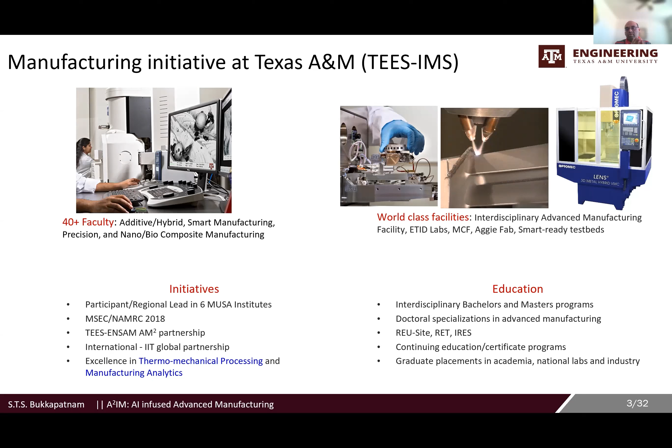Coming to smart manufacturing, the area I work in, it's really advancing and including digital twins as part of its advancement. Before getting into details, let me give my view of how I see smart manufacturing. When people think about manufacturing, they think about making things.

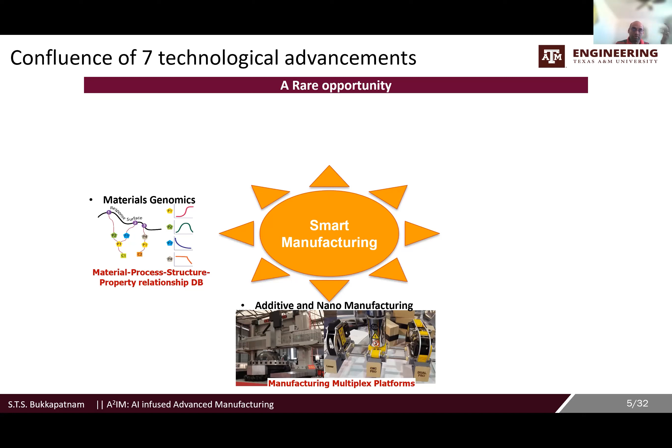In recent years, the idea of making and the maker revolution has taken off, especially with 3D printing and advanced manufacturing technologies. In addition to manufacturing platforms like additive, we're seeing advances in materials, AI, data science, sensors, wireless communications, computing systems like cloud, and clean energy sources. Smart manufacturing is basically a platform where you bring these together to advance the industrial footprint and its impact on society.

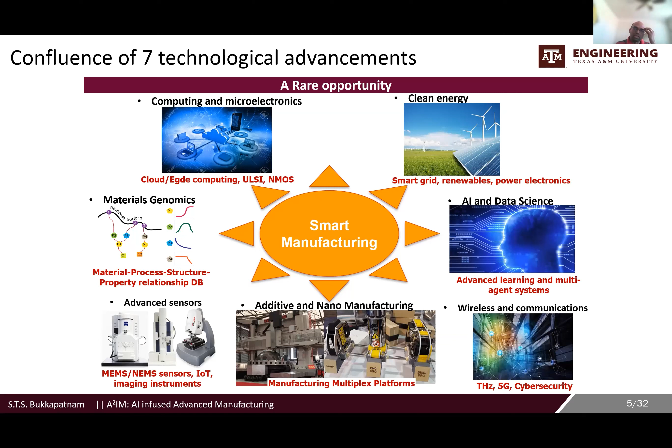About the impact: manufacturing contributes 12% of US GDP, and it's on the upswing given the times we live in. More importantly, from a smart manufacturing standpoint, there's a huge data opportunity yet to be tapped well, which is where those of us into digital twins can find fertile ground. In fact, manufacturing generates more data than any other sector, including government. However, very little of that data is used for practical applications.

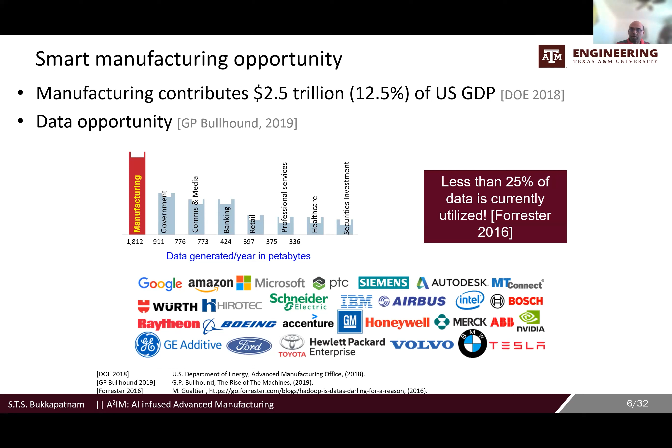Not just academics, even industry has fully recognized this issue and is trying to go big into the smart manufacturing revolution. So how can we use this data to understand the process and build models? Essentially, digital twins could be one way of building or thinking about this, using those models to effectively understand performance, as well as monitor and control the process.

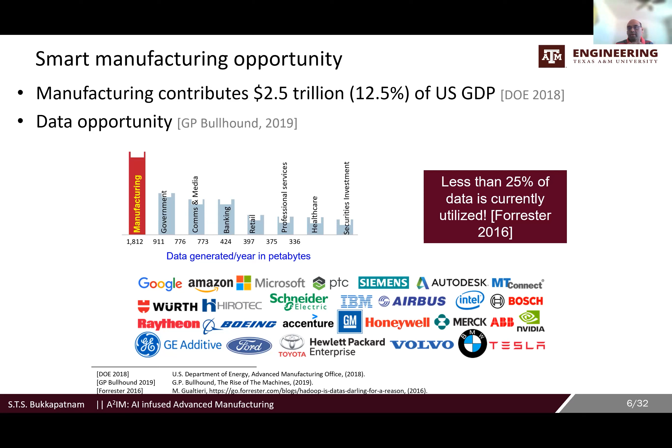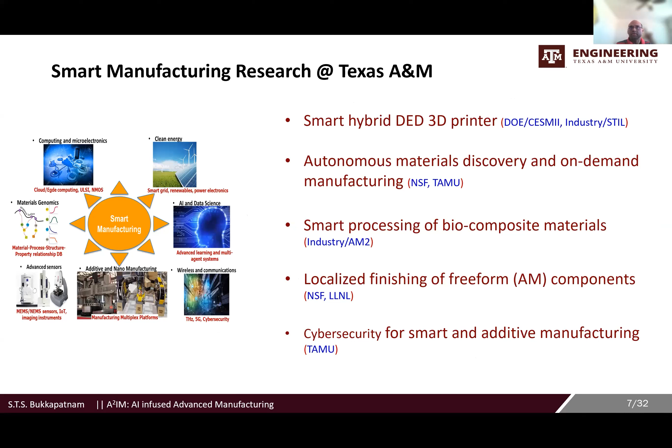At Texas A&M, my current research portfolio consists of things anchored around smart manufacturing, both at the machine tool level and at performance levels. We have sponsors from both industry and government advancing this work, and we're always looking for good collaboration opportunities. And when I say we, it's not just me, but 40 of us in the manufacturing group.

Now I'm going to shift gears and talk about how I see digital twins coming in and advancing smart manufacturing. When we think about digital twins, the first thing that comes to mind is a digital twin for a particular machine, like the photographs I showed you. Essentially, can we control the laser so you can study its performance? That's usually what's thought of when people think about digital twins.

But as we've seen from the diverse presentations today, there are interesting challenges at the systems level. I'm going to provide a quick case study to illustrate where digital twin technology can really help us monitor, predict, and possibly control the performance of your system, the integrity of the system, as well as help with maintenance of the entire plant.

At the machine tool level, I'm not getting into the details because other groups pretty much look at the mechanistic aspects of how the various electromechanical components that are pertinent to a manufacturing shop floor behave, and how we can monitor their degradation and ensure reliability of the various assets in your plants. But going from the systems to machine tool, there is something else to think about.

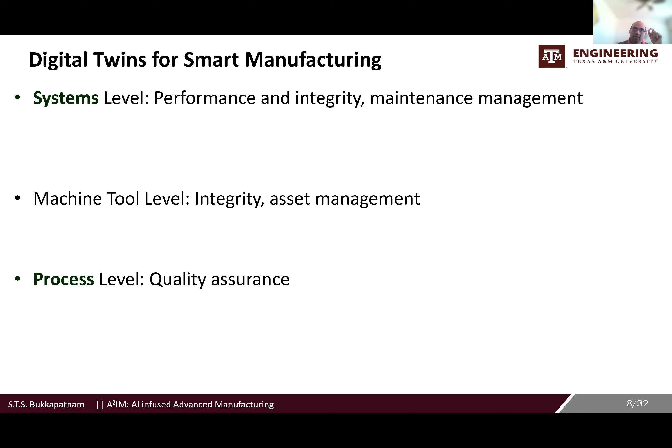For the remainder of this talk, I'm going to go into specific case studies to illustrate the points I just laid out, both at the system level and the process level.

However, I will ignore the machine tool level discussion because it's not just germane to manufacturing alone—various engineering domains have similar challenges for digital twins, be it aerospace, transportation, or building, as well as machine tools. Whatever operates its digital twin is basically similar to what I'm thinking in terms of machine tool level digital twins. But the systems and process level are kind of unique to manufacturing.

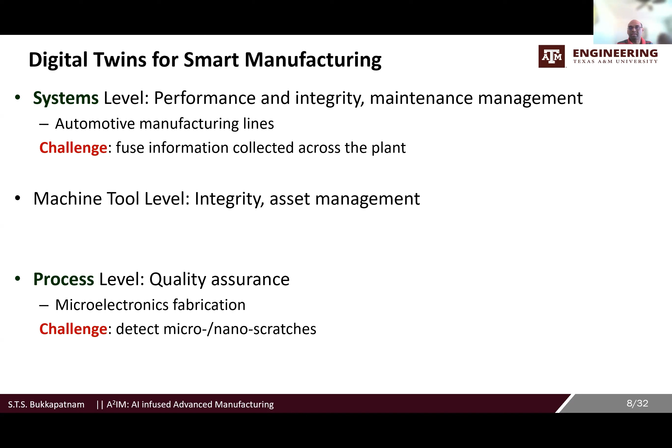And that's why I'll spend a little longer time on each of those. First, let me talk about the systems level digital twins. Before I do that, I wish to say that much of what I'm going to talk about from this point is from two of my papers.

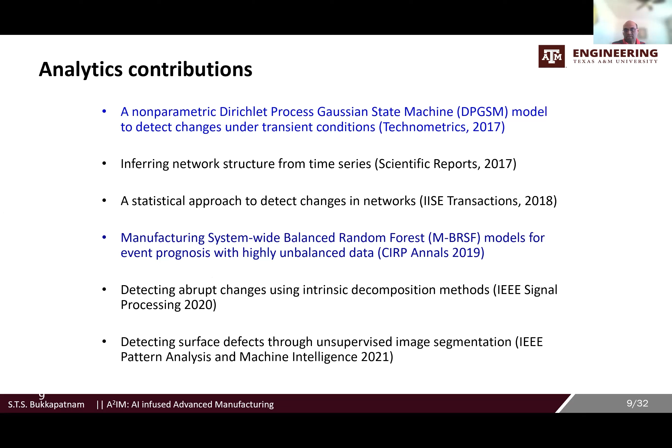On the systems level, I'm going to discuss based on the fourth paper, and at the process level, I'm going to talk about what's available in the first paper I mentioned. At the systems level, let's think about an automotive manufacturing plant.

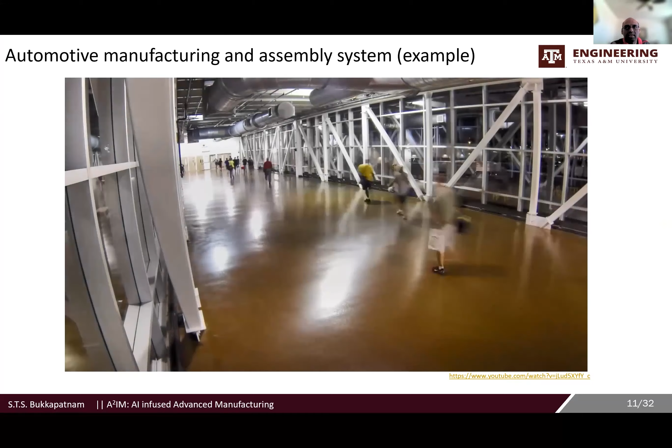Suppose you go to a factory floor where a car gets made. This is a typical video that you could see, showing how this process actually happens.

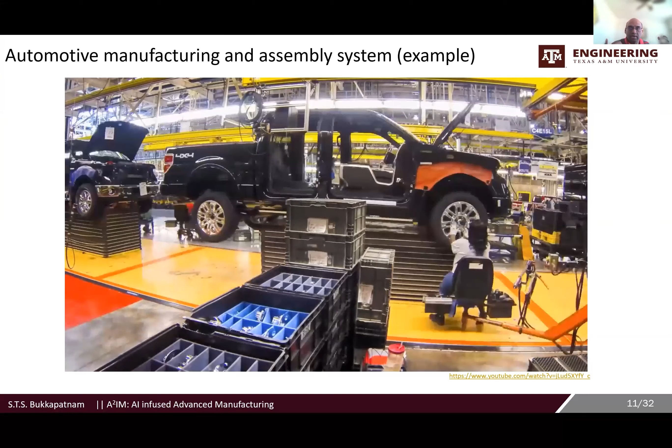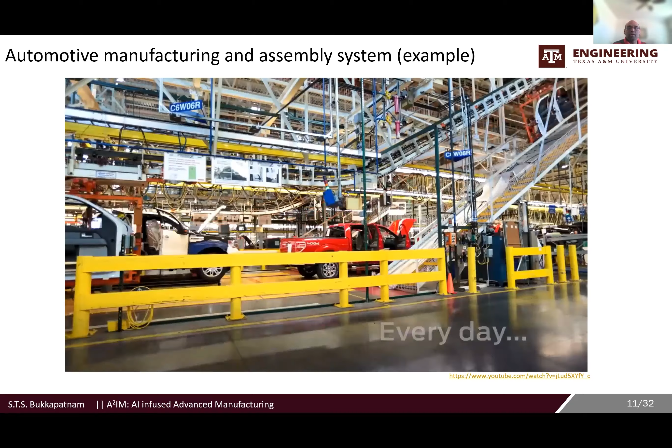A lot of people and a lot of stations and things that are moving—both the things that are getting made as well as the things helping move them as they're getting made. There are also tools helping transform them from the initial stage to the final stage. So in a typical manufacturing shop floor, you're pretty much looking at...

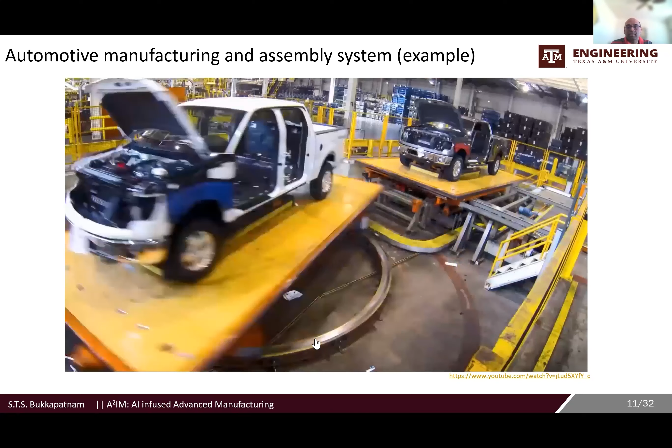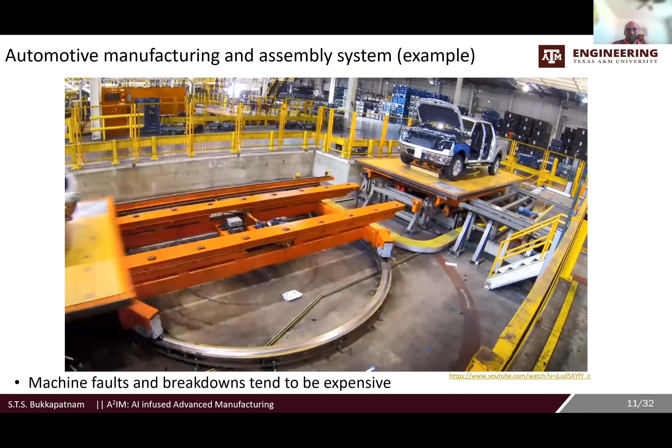basically hundreds of thousands of dimensions of a state space to monitor and then control. In other words, if you want to really understand a manufacturing shop floor, you have to think about maybe hundreds of thousands of variables and track how they're growing over time as well as in space. And that's what it takes to really mimic or create a true digital twin of a manufacturing plant. But that's just from a first principle standpoint.

But there is something else you can think about: can we actually look at the actual data that emerges from these plants and use that for building those digital twins? That is what I talk about here.

And this data is becoming extremely prevalent and abundant in these manufacturing plants. These plant floor systems that I talk about, that I see on the slide, are growing at 6.5% every year, and they're garnering a large market in the industrial shop floor.

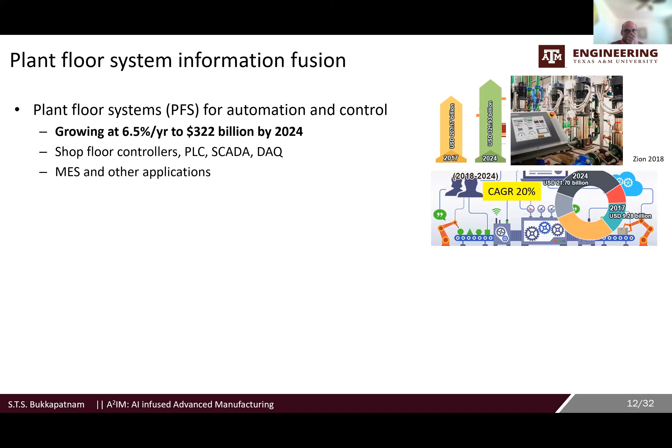What they do is go and record the status of everything happening, everything that moves from place A to place B. There's also software systems that handle higher level control—when you're releasing a particular part to go from one place to another, or allowing a particular robot to go pick up a part—all controlled at the software level using what is called a manufacturing execution system.

They are growing really fast. And more importantly, those of us aware of Internet of Things sensors know they are really getting absorbed into manufacturing environments, growing at 40% annually. So together they're creating a huge data load in the industry.

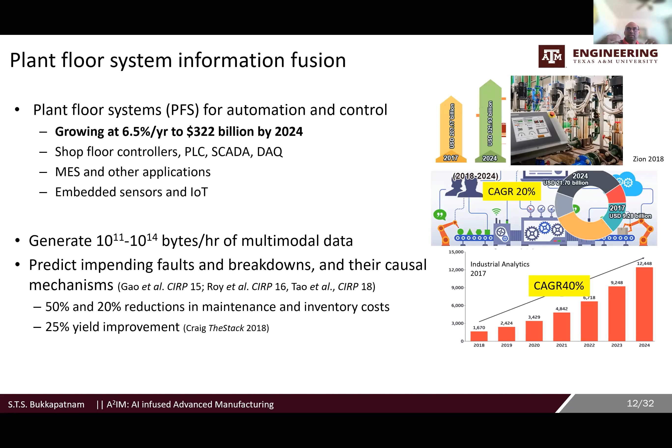And that is a huge opportunity, because if we can really use this data, maybe one of these days we can create a good digital twin with which you can predict what's happening. Researchers have shown that you can use this data to effectively predict faults and breakdowns in a shop floor, thereby bringing 50 to 20% reductions in the cost expended for maintenance as well as holding backup parts, called inventory, and so on.

And more importantly, if you don't do that with all the digitization that's happening in manufacturing, you're going to see a similar kind of catastrophic event, such as a blackout that might destroy the entire manufacturing network, because everything is now connected in the industrial environment.

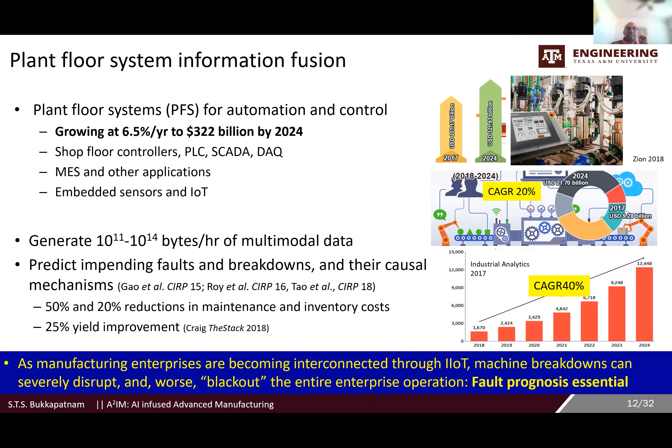Now let me spend the next 5 minutes talking about a few quick case studies. A manufacturing plant—I won't get into the details of where and what this plant is about—but let's assume this is a segment of your automotive industry where you're trying to make a simple component, which consists of a bearing as well as the race that goes into one of the engines or engine-related parts. That particular small segment of the plant has about 20 machines, and they are connected together.

The part actually goes from this end to this end. There's another part that goes from this end to this end, and then together they are all assembled, and then sometimes they are reworked and so on. So you have multiple machines, multiple handling systems, going through very complex routing and so on.

But there is a lot of uncertainty. How long that particular part spends in each machine is not deterministic. When a particular part arrives is not very well known, because that depends on the demand and the releases and so on. And also the routes can change depending on what happens in the previous stage. So essentially it's a complicated system.

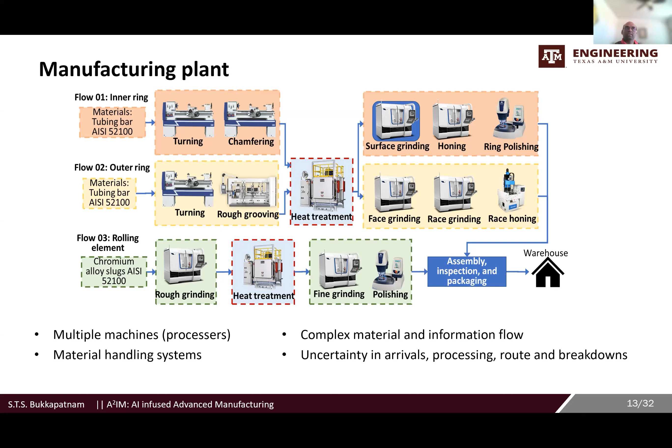In order to track that, you really need to build a very effective understanding of the process and use the data. And here we are developing a manufacturing process-driven machine learning approach to address this challenge.

And the challenge here is, can we actually predict the breakdowns of machines by using the data from some of these machine tools, the plant floor information systems?

And we take advantage of our understanding of the manufacturing process, in the sense that we know a part released from a particular location has only a finite number of places to go, and it has a particular recipe that it's executing. That is, a car has to go from wheels, and the wheels have to be under a particular bonnet and so on. So that's the whole idea we build in to create a network, and based on that, we make the predictions.

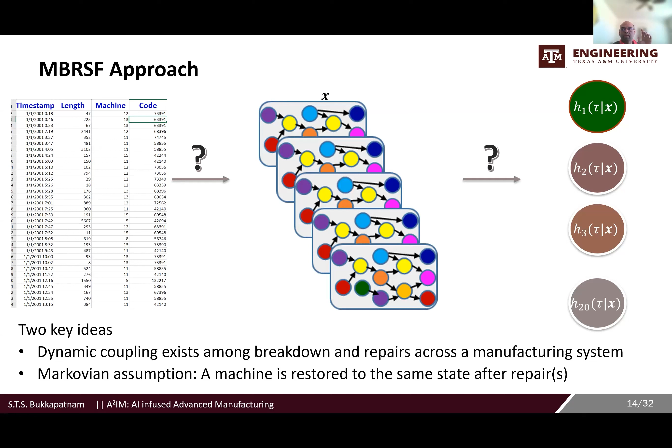To get into some details of the matter, what you have in the logs from these manufacturing environments are sheets like this. What they show is at different times, how long a machine has been working, and then what kind of fault it had, and so on.

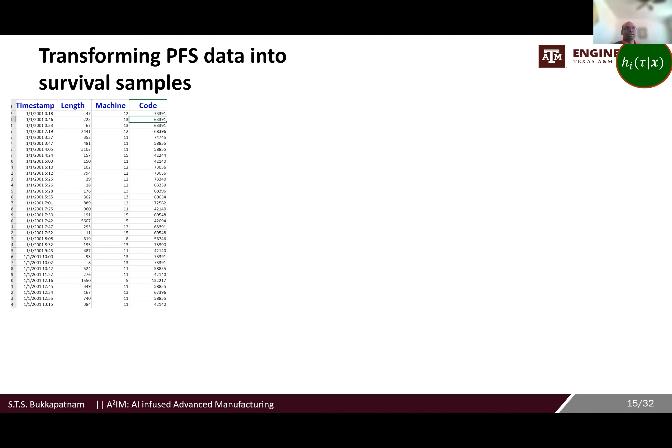And the whole idea is, can I use this historic information to be able to predict the probability of the machine breaking down at every point in time in the future? And the probabilistic description of this is given by this hazard function H.

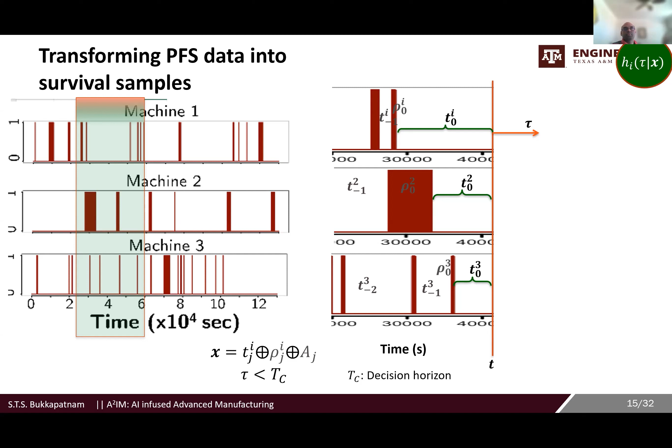So given all the inputs that you can gather based on this data set about every machine—about how long this machine has been up, for every machine, and then how long the machine was under repair for every machine, and also whether the machine is currently available or not—that is, times that the machine has been up, the duration for repairs, as well as the current availability of these machines—we can actually use this as an input to make this prediction.

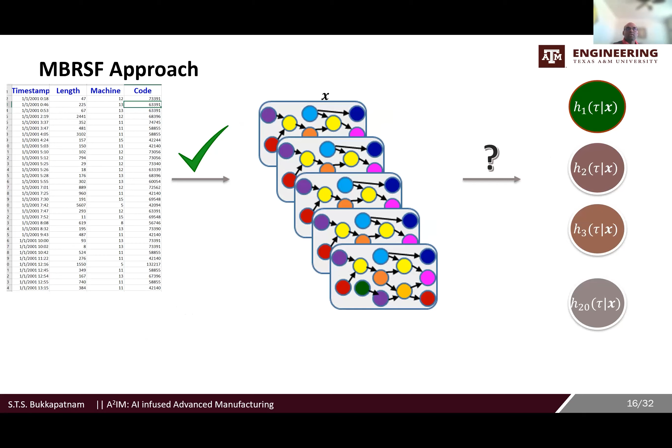How do we do that? That basically takes us to this approach that we have taken. We essentially take this simple data from this machine to create this graph that I just mentioned, where you combine this data about when the machines were up, the repairs, and so on, and how they are connected. And then we actually build a machine learning model to be able to make that prediction.

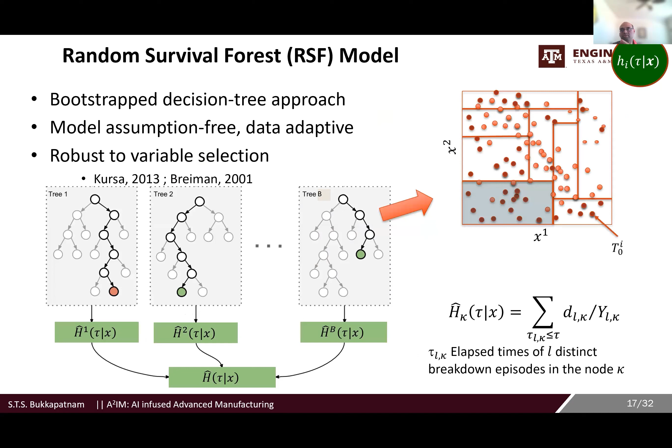And in the interest of time, I'll skip all the details about the machine learning model that we had to build, as well as how we had to tune it because of some of the nuances of the manufacturing environment.

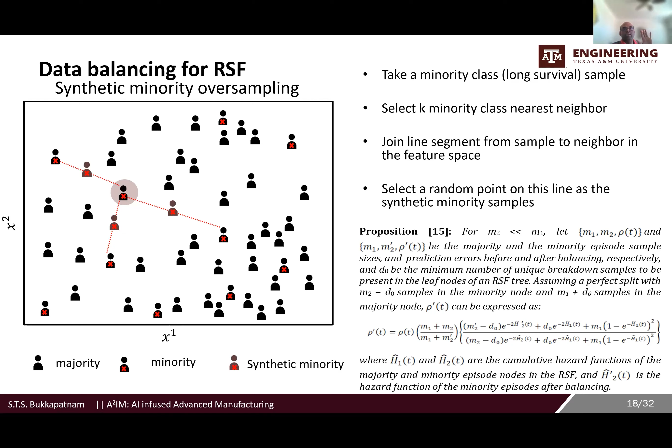Skipping all the details, I will talk about what this whole approach has led us to. For this 20 machine project that we were doing with an automotive company, we were able to demonstrate that using our approach, we could reduce the error for predicting the faults by a significant amount.

It's actually 2 orders of magnitude reduction. And more importantly, we could predict the impending breakdown of a machine using this digital twin that we built to an accuracy of about 90%.

So the implication for the manufacturing shop floor is that they could come at the beginning of a shift and look at the historic data, feed it into our machine learning system and the digital twin, and get a prediction of which machines are likely to break down based on the historic information. They can do that at the beginning of every shift, and then do it adaptively.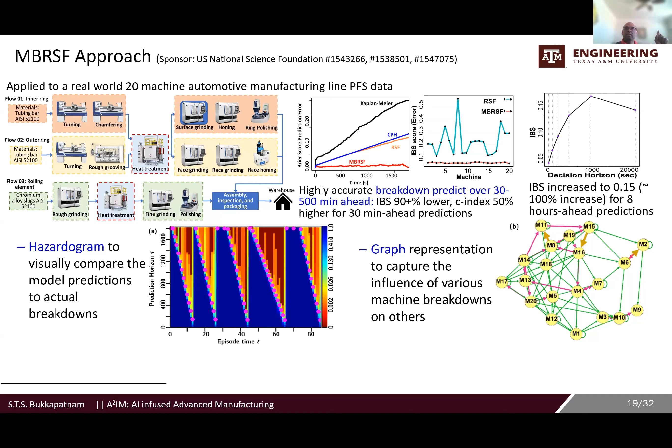They can also go back and trace what may have been causing a particular machine to break down. So you can actually create some provenance using this approach. We are also working with using additional IIoT sensor data to make these predictions much more reliable, as well as do it over a much longer term. And that is the first case study.

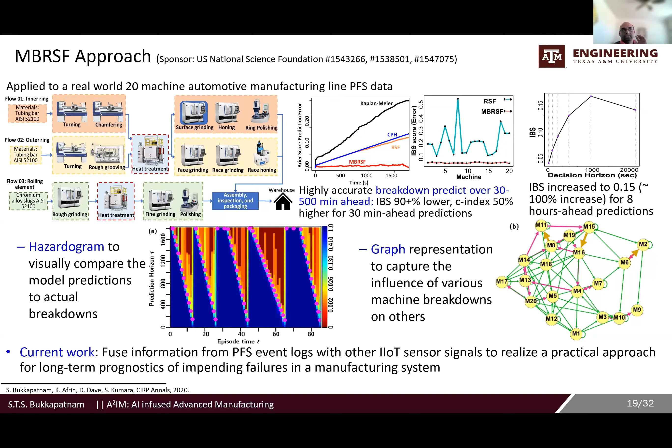I think we are close to the times allotted to me. There is an interesting case study at the process level also, which I will not get into. Instead, I would like to conclude today's presentation by thanking the organizers for putting together such a fantastic event here on campus. Also, digital twin within the manufacturing domain is an exciting area, both at the system level, the machine tool level, as well as the process level.

At the system level, I hope my discussion gave a glimpse of the complexity of a manufacturing environment, as well as how the use of data-driven approaches with a good understanding of the underlying domain knowledge can help address innate problems like predicting breakdowns in a complex environment, localizing where it is, and detecting what may be causing them. With that note, I wish to conclude my presentation and thank you so much.

Thank you, Santosh. It's very, very interesting. We have time for one quick question. Anyone from the audience?

So Santosh, I have a question. Probably you have seen the demonstration at NVIDIA GTC. They demonstrated this whole factory of BMW, there's a digital twin of the whole factory there. Yes, and they have multiple production lines, and they simulate every single process of that, so they have pretty high fidelity. Now the question goes back probably to the question the team presented this morning about the fidelity of the digital twin here.